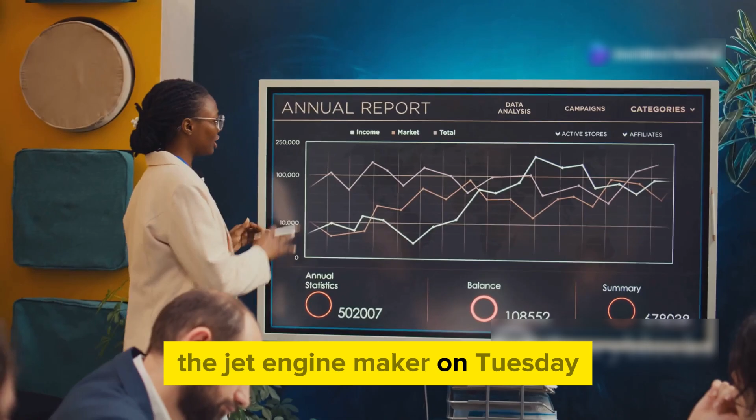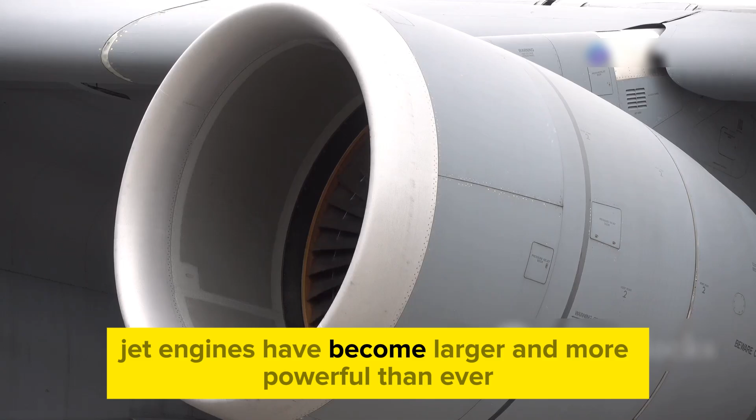Rolls-Royce is vowing to deliver a big jump in profits. The jet engine maker on Tuesday set a target of over $3.5 billion in operating profit over the medium term. With the ever-increasing requirement for fuel efficiency, jet engines have become larger and more powerful than ever. The General Electric GE9X is the biggest jet engine ever produced. However, Rolls-Royce is taking things to new levels with their Rolls-Royce Ultrafan.

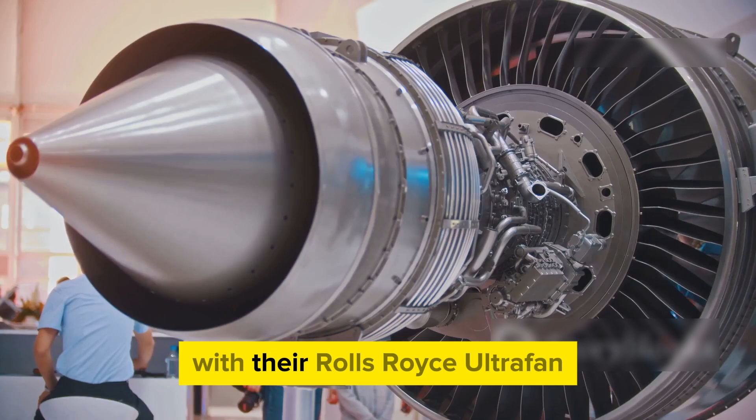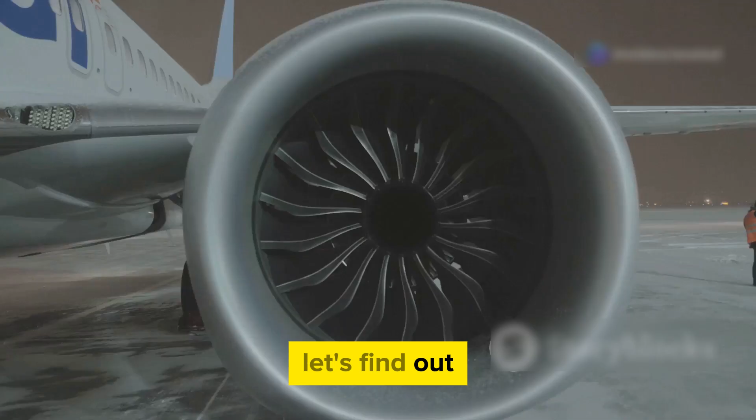This huge engine is a sneak peek into the future. But does this mean that Rolls-Royce is taking over the aviation industry? Just how big is this new engine? Let's find out. Before we talk about how big and strong this new engine is, let's understand why they're making it. For the past 10 years, airplane companies have been working hard to make engines that use less fuel.

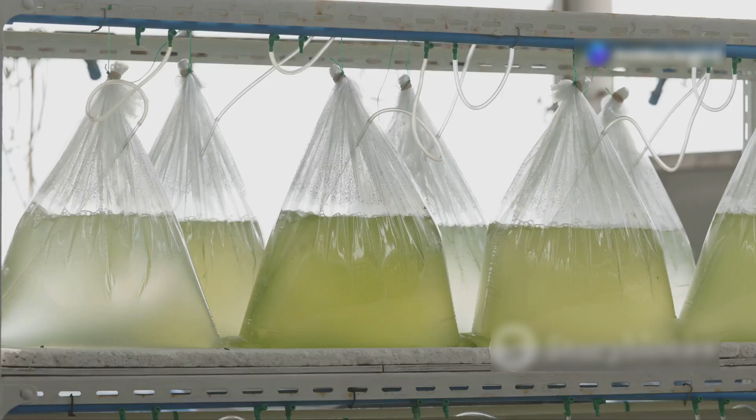And are nicer to the environment. They're worried about climate change and too much carbon in the air. They want to stop the United Nations prediction that emissions will triple by 2050. Airlines are starting to look into using sustainable aviation fuel. This fuel comes from things like old cooking oil or algae, not from regular oil like before. It's a big change, but it's worth it because it can help cut down on pollution from airplanes. Airbus is taking the lead in using sustainable aviation fuel for all its planes by 2030.

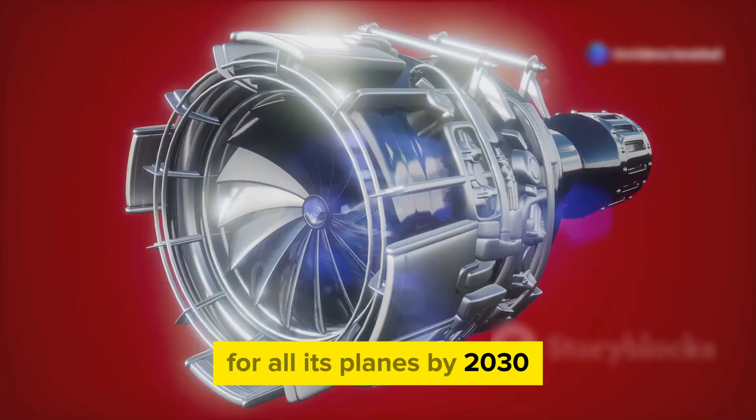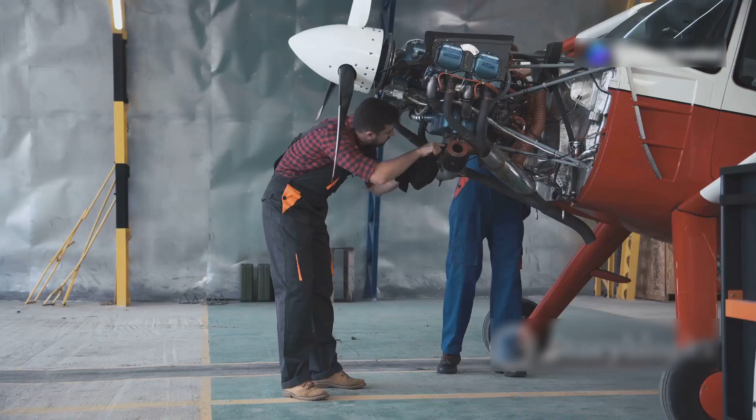This has set off a competition among engine makers like Pratt & Whitney, Rolls-Royce, and GE Aerospace. They all want to create engines that are good for the environment and strong enough for the new planes of the future. Not only that, but even companies are teaming up too. We have CFM International, which is a partnership between GE Aerospace and Safran, and International Aero Engines with Rolls-Royce, Pratt & Whitney, and others. They're all working hard to be part of this eco-friendly race.

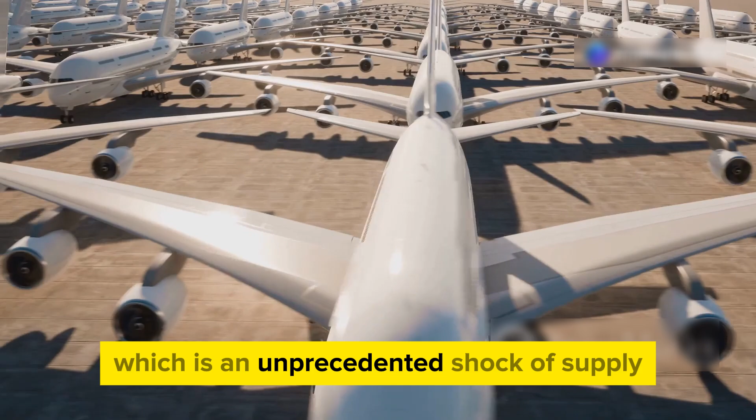Demand is back. It's totally back. Where is supply? We've gone from an unprecedented shock of demand back in 2020 to what we see today, which is an unprecedented shock of supply. Many engines from various companies are now available, showing how they're getting better at saving fuel and being eco-friendly.

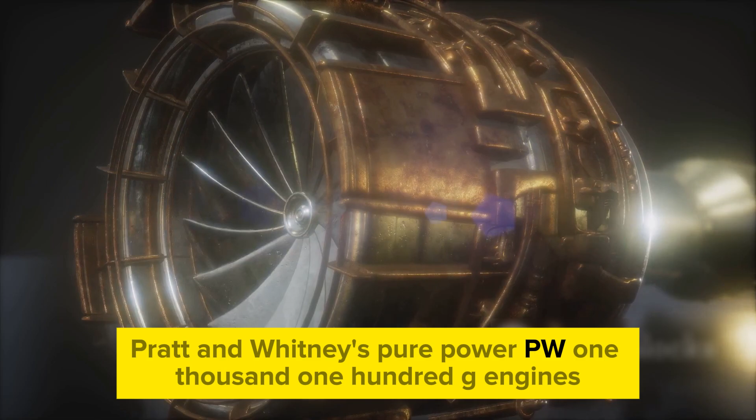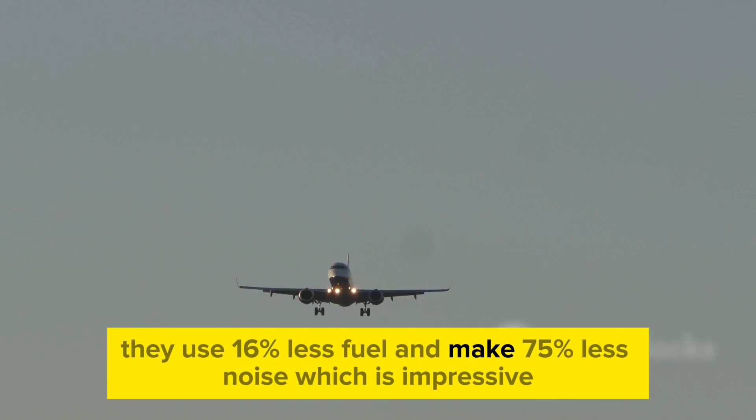Pratt & Whitney's Pure Power PW1100G engines, especially the PW1135GJM type, are a great example. They use 16% less fuel and make 75% less noise, which is impressive. These engines are used in planes like the Airbus A321neo.

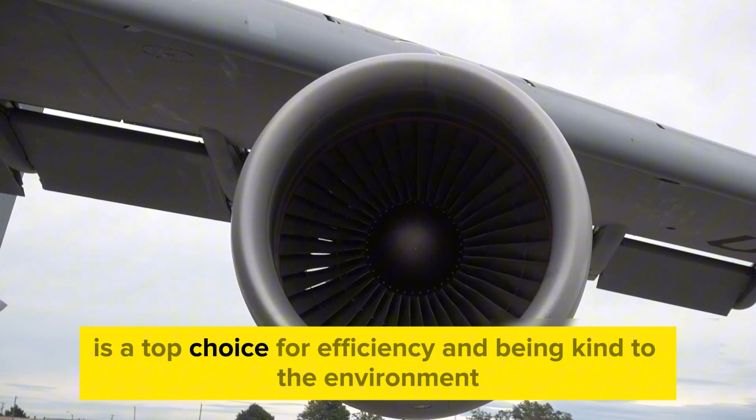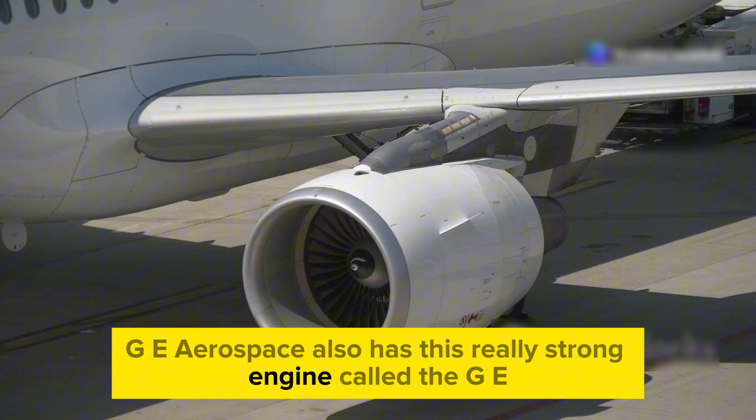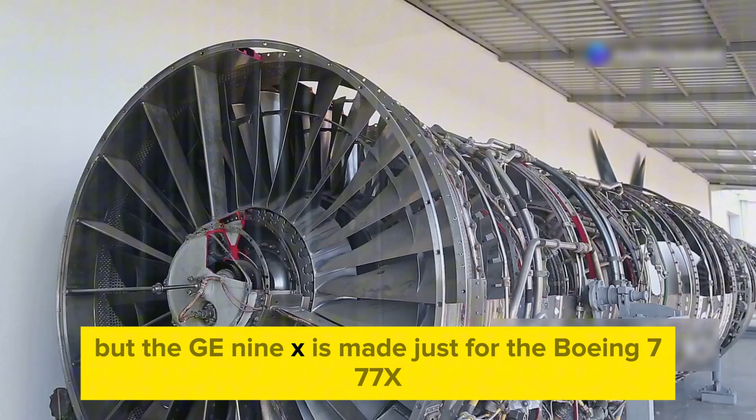That's not all. There's also CFM International's LEAP engines. The LEAP 1A engine, introduced in 2016, is a top choice for efficiency and being kind to the environment. It's used in planes like the Airbus A320neo. GE Aerospace also has this really strong engine called the GE9X high bypass turbofan engine. It used to be the biggest jet engine until Rolls-Royce made their Ultrafan, but the GE9X is made just for the Boeing 777X and hasn't been fully tested yet.

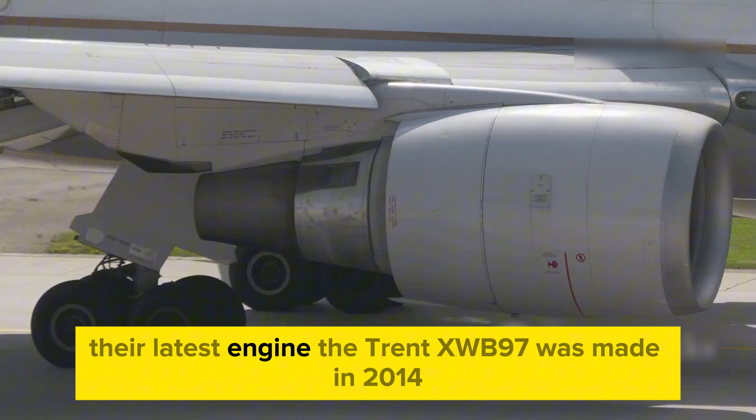But what about Rolls-Royce? Well, they have had some tough times in this competition. Their latest engine, the Trent XWB-97, was made in 2014, and now they're working hard to catch up in the engine race. Even though it's Rolls-Royce's strongest engine right now, it was made before people cared a lot about being eco-friendly in aviation. So the Trent XWB-97 powers the longer-range A350-1000, so it's a heavier aircraft.

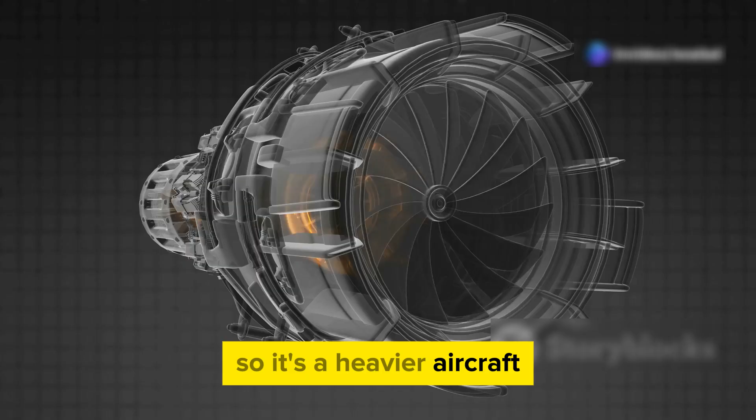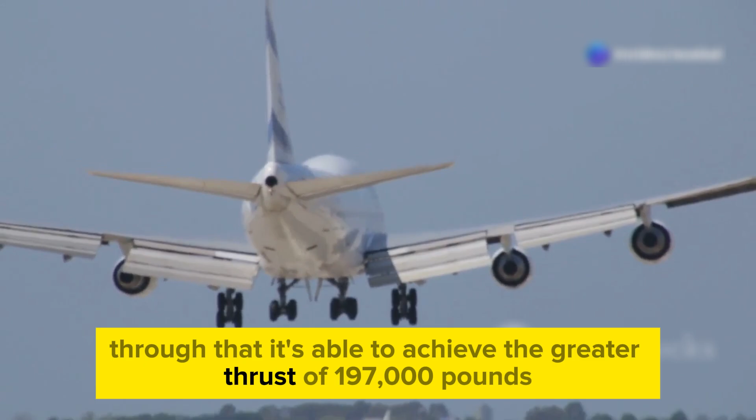So how does it achieve this greater thrust? Through a combination of factors: its advanced fan dynamics, it's got a higher temperature in its turbine, and it has a larger core. Through that, it's able to achieve the greater thrust of 197,000 pounds.

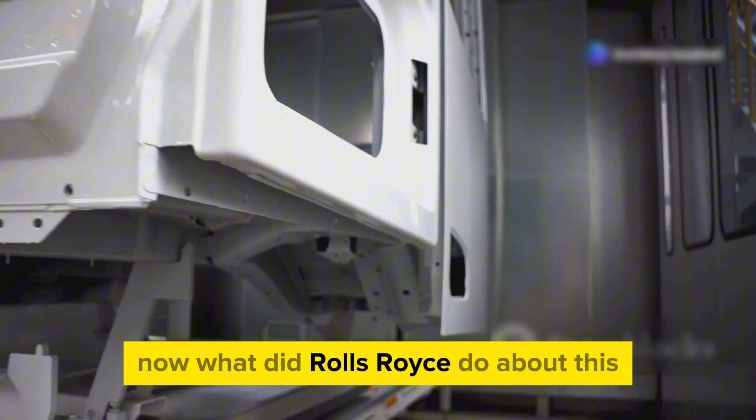Rolls-Royce lost a lot of money on the XWB engine project because of COVID-19. Also, they mostly make engines for big planes, but more people want engines for smaller planes now. Now, what did Rolls-Royce do about this? They introduced the Ultrafan idea.

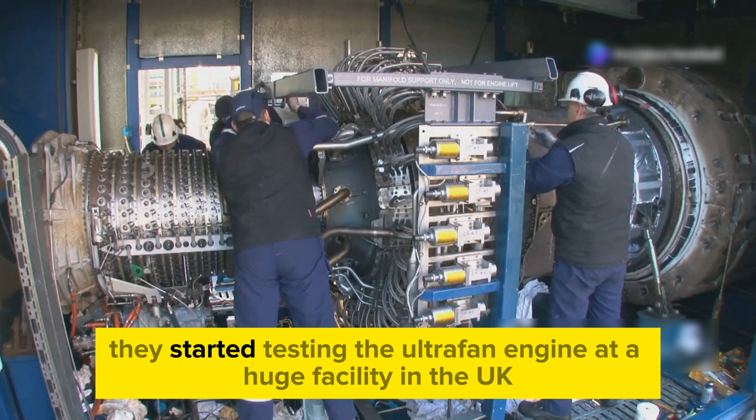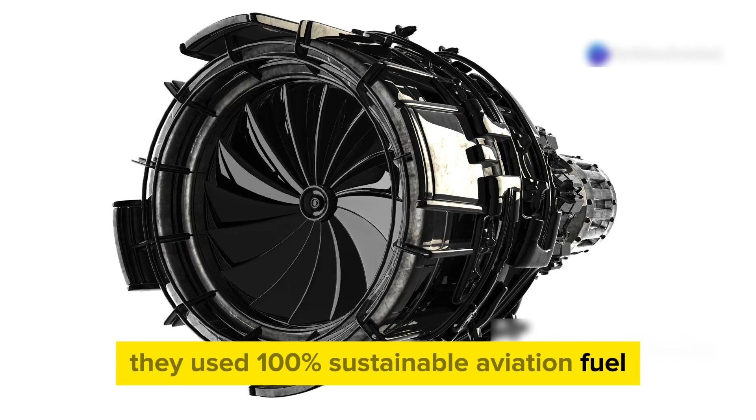This was back in 2014. They thought it would be a new engine for planes, but because Airbus and Boeing didn't show much interest, they decided to use it to try out new technologies instead. They started testing the Ultrafan engine at a huge facility in the UK in early 2023. For the first test, they used 100% sustainable aviation fuel. Then, in April 2023, they ran the Ultrafan demonstrator for the first time.

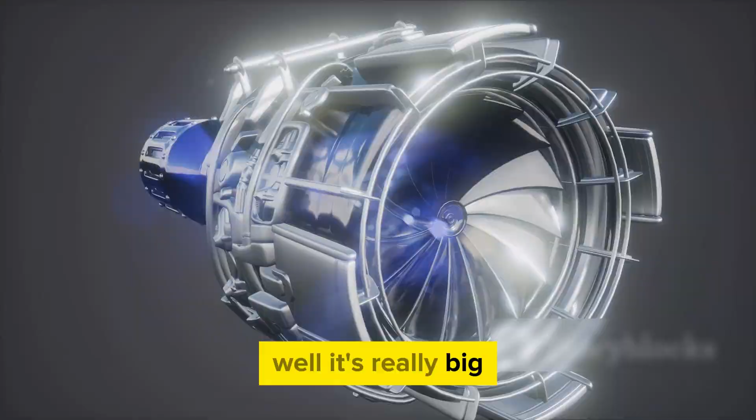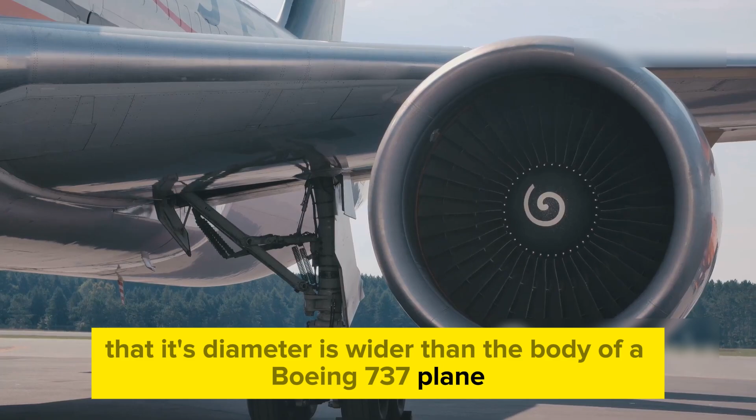What are the notable features of the Ultrafan engine? Well, it's really big. It's even larger than the GE9X, which was the largest engine before. It's so big that its diameter is wider than the body of a Boeing 737 plane. The Ultrafan is 140 inches wide, which is almost 4% bigger than the one before it. That's why it's called the world's largest engine.

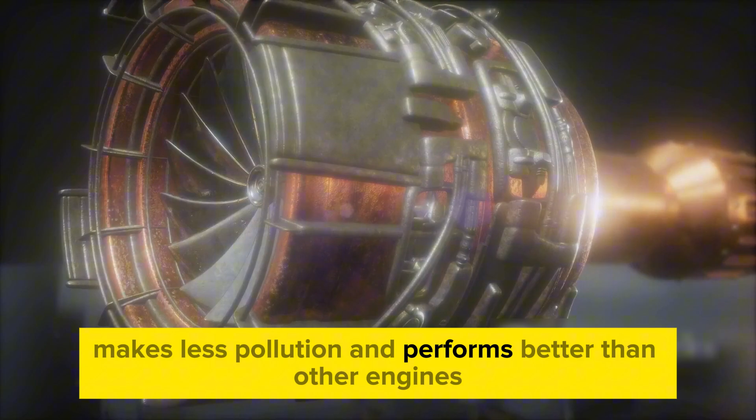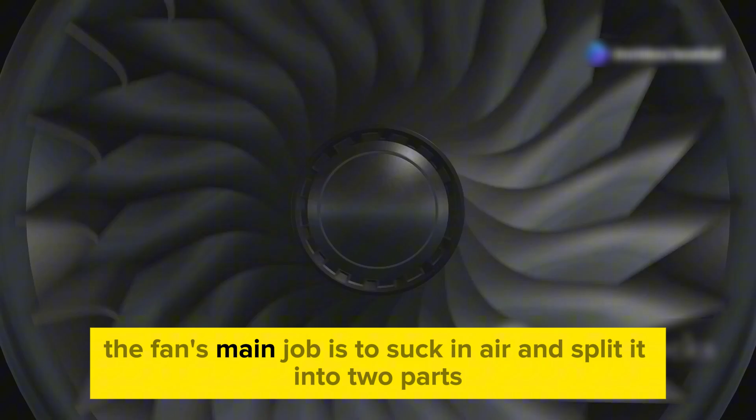But it's not just about its size. The Ultrafan could change how we fly because it's more efficient, makes less pollution, and performs better than other engines. So how does the Rolls-Royce Ultrafan operate? Basically, it's a turbofan engine made up of important parts: a fan, compressor, combustor, and turbine. The fan's main job is to suck in air and split it into two parts. One part goes through the middle, where it gets squeezed, mixed with fuel, and lit up to make power.

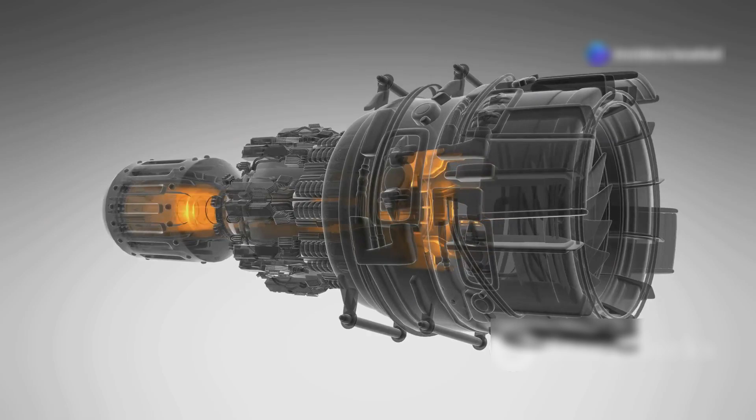Engineers need years to design an airplane engine. Some of these engines are so ingenious that they win Guinness World Records. The other part goes around the middle, adding even more power. The ratio between these two parts, called the bypass ratio, is very important because it affects how well the engine works and how loud it is.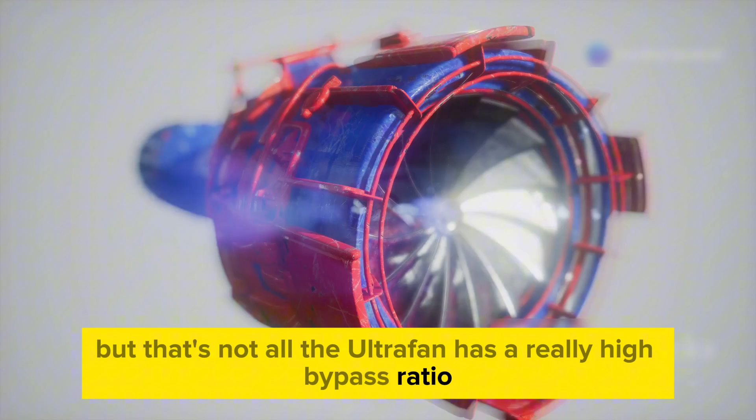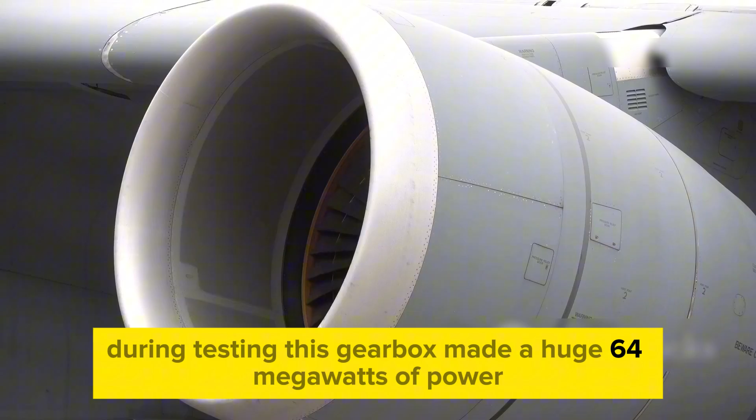But that's not all. The Ultrafan has a really high bypass ratio, about 15:1. They achieved this by making a big fan and a small core. This not only makes the engine work better, but also makes it lighter and simpler. Also, they added a special gearbox to connect the fan to the turbine. This lets the fan spin at a different speed than the core, which helps it work better. During testing, this gearbox made a huge 64 megawatts of power, breaking a record in aerospace. Another cool thing about the Ultrafan is its fan blades, made from carbon.